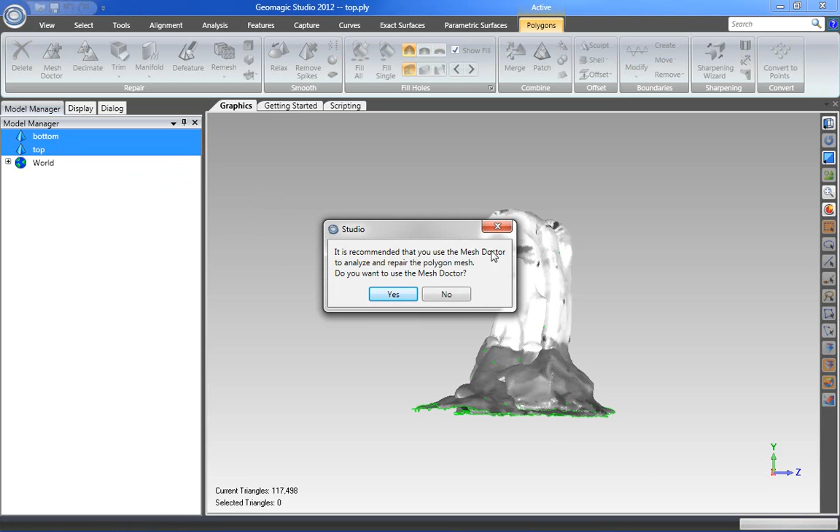You can select multiple files with the Control key and then click Open, and this will open up both of the files using their file names. It asks me if I want to use a mesh doctor. No.

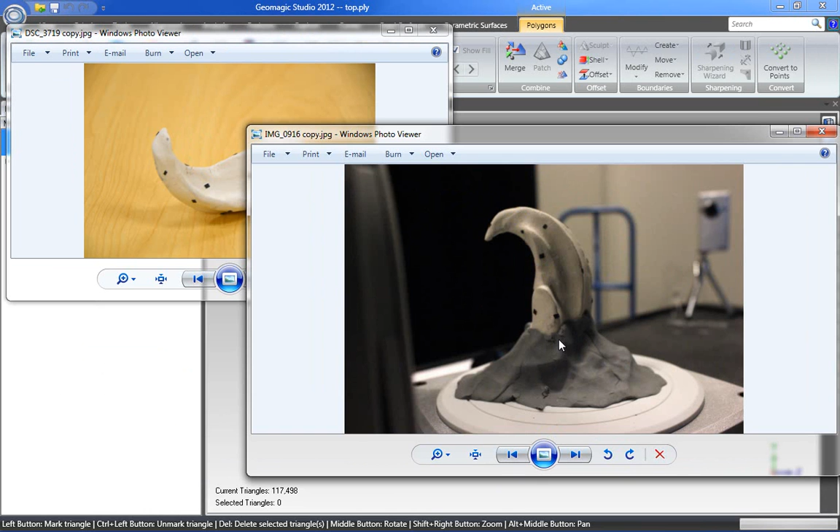Just to give you a brief context as to what we're looking at, this is the original object, and it was scanned in two different orientations. So in this orientation, I did a number of scans all the way around, and then flipped the object so this top part was embedded in the plasticine below, and then the part that's buried right now was then scanned.

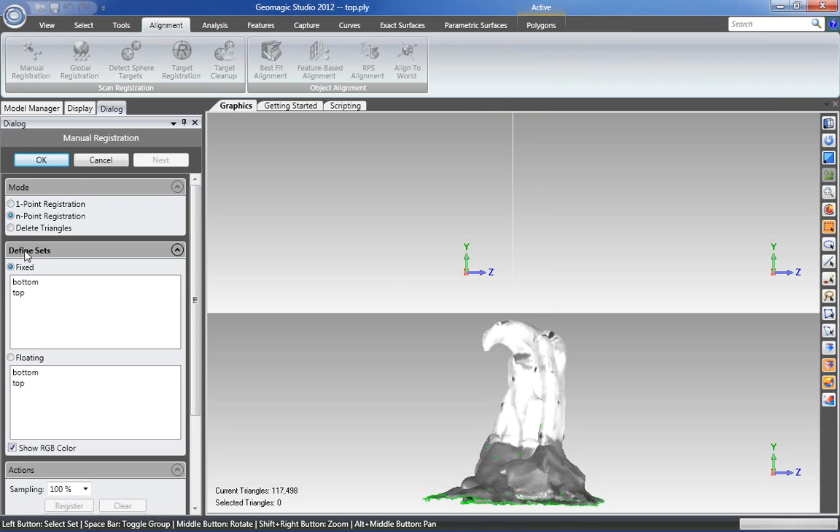So the first thing I'm going to do is go to Alignment, and I want to do a manual registration. Under this section here, I'm going to leave this on n-Point Registration. I'm going to select bottom. This is the part that's going to be fixed, and then the top part is going to be what's going to register to it. Based on what we were looking at before, these are both pointing up right now, but one of them actually has to get moved relative to the other one.

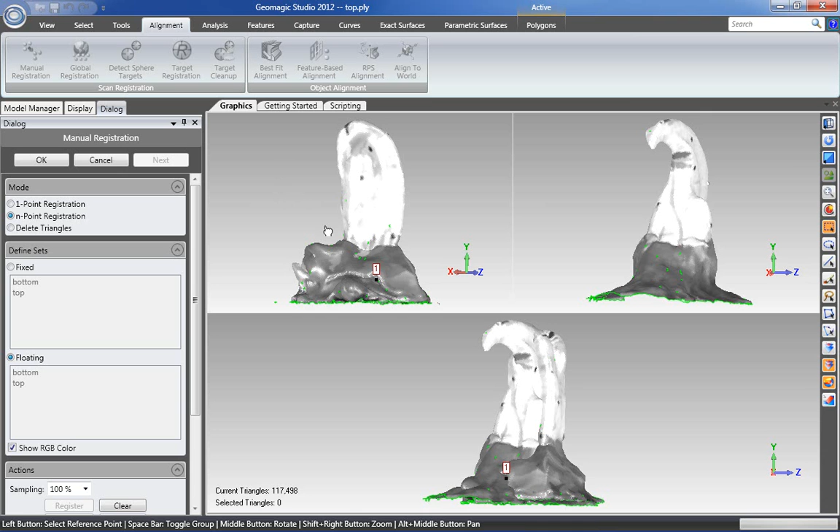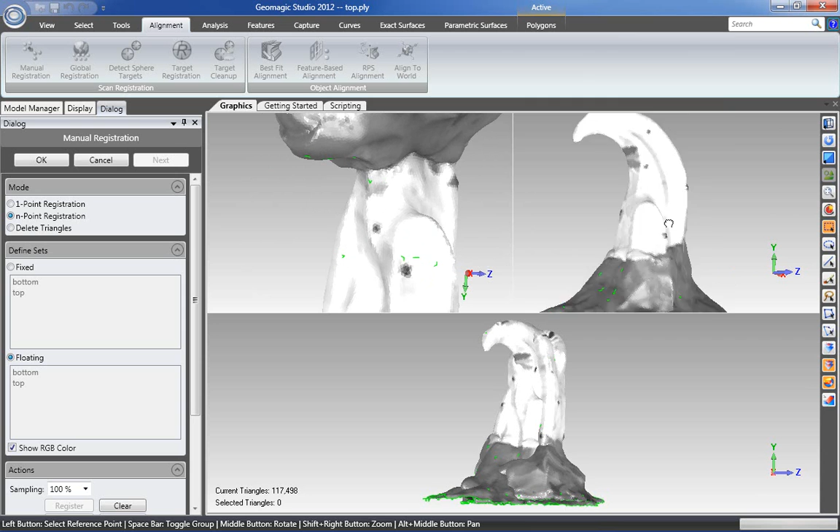So what I'm going to do is rotate this model so that it's upside down, but relative to this other model here, they're in the same orientation now. And then I'm going to simply look for a few common areas. It might also help if under Display I turn off my vertex color, so I'm just looking at the geometry now, because those registration points weren't the same in both cases. I moved things around when I was scanning, so they're not actually going to be that helpful.

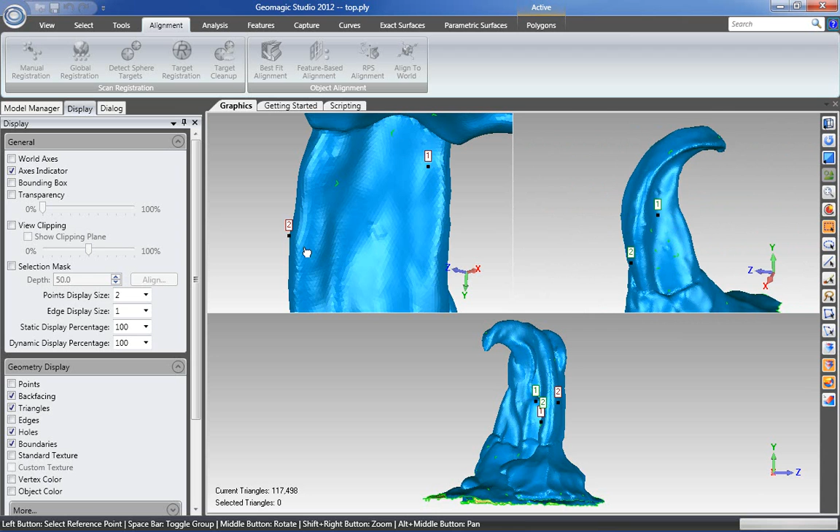So I'm going to just choose a few common points here. Maybe this guy right over here. Every time I click, I'm adding a number. I need 3 numbers. If I make a mistake, Control Z to undo, so I can undo my last placement. Looks like this guy right here is going to work as well. So I have 3, and if I go back into my dialog here, I'm going to click on Register. It's going to calculate, and then it's done. So I'm going to click OK.

The next thing I need to do is basically get rid of all this extraneous information, all the original plasticine that I was using for both these pieces.

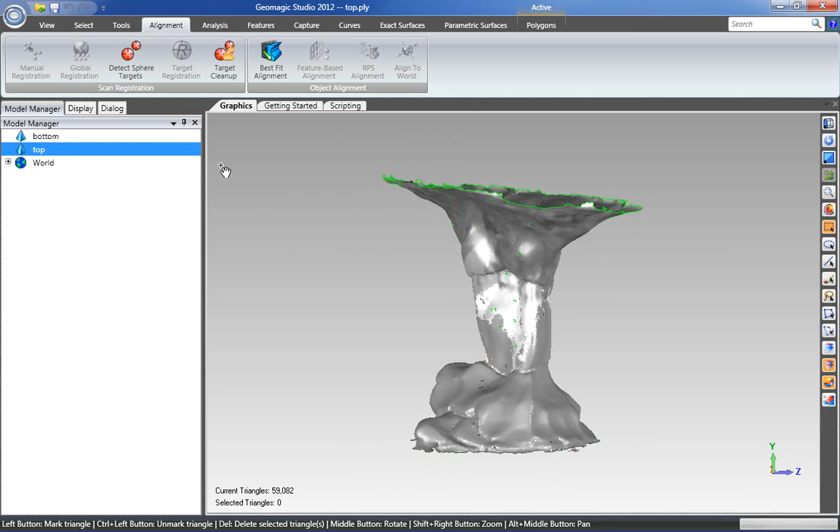And just a quick note about navigation here, you can see that as I click on one or the other, it sort of cycles between the two. When I have my bottom piece selected, you'll notice that I can't select this top area here. Only the bottom section is selectable, and vice versa. When I click on the top, it is now active. The bottom is not active down here. So that can be a good thing in terms of selecting things.

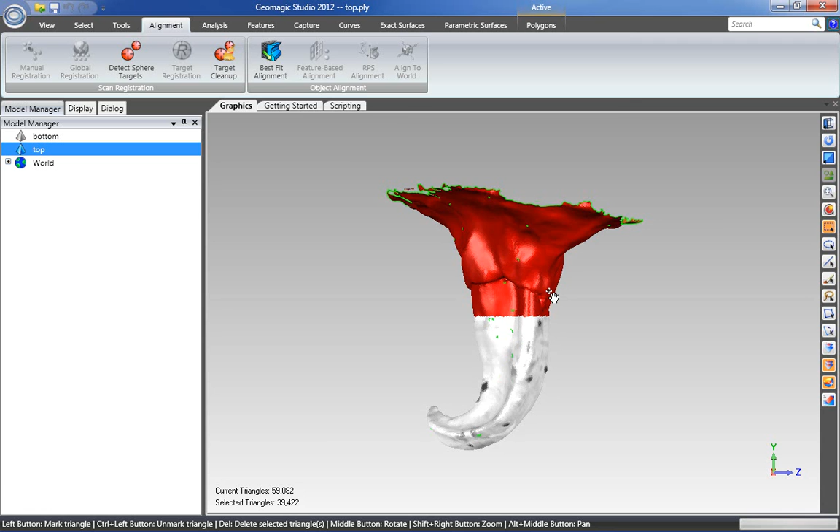I'm going to just look at things from the side here, and what I want to do is essentially get rid of, well, actually if I hide this, I can see this more clearly. I want to select everything that I'm not going to need, and I've got a decent amount of overlap between the two scans, which is fine, but I just want to make sure that I'm selecting all the way around. All this stuff here I definitely don't need, so I'm going to hit delete on that, and hide that previous selection, and then do the same thing on this bottom part here. And I want to be fairly generous with that selection.

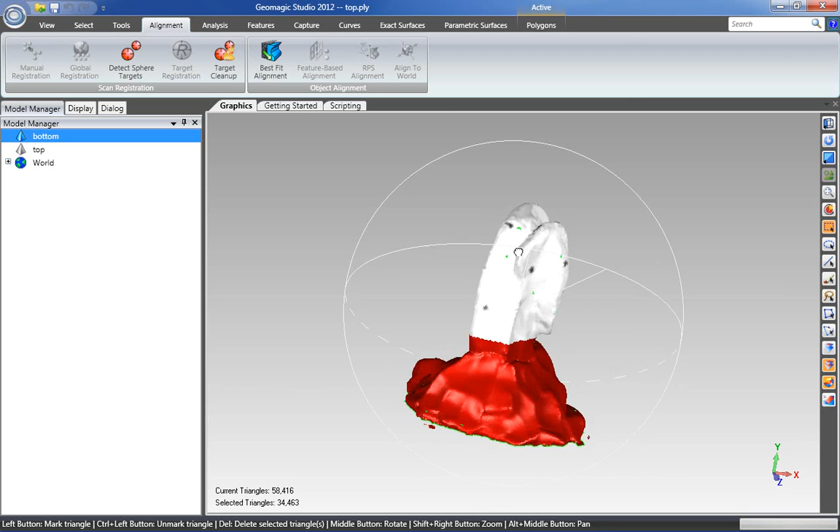I don't want to be too skimpy, because that data, as it gets closer and closer to the plasticine, that's definitely not going to overlap with the other part. And we want to make sure that what we're going to be using in the end is sort of universal to both pieces, as you can see right now.

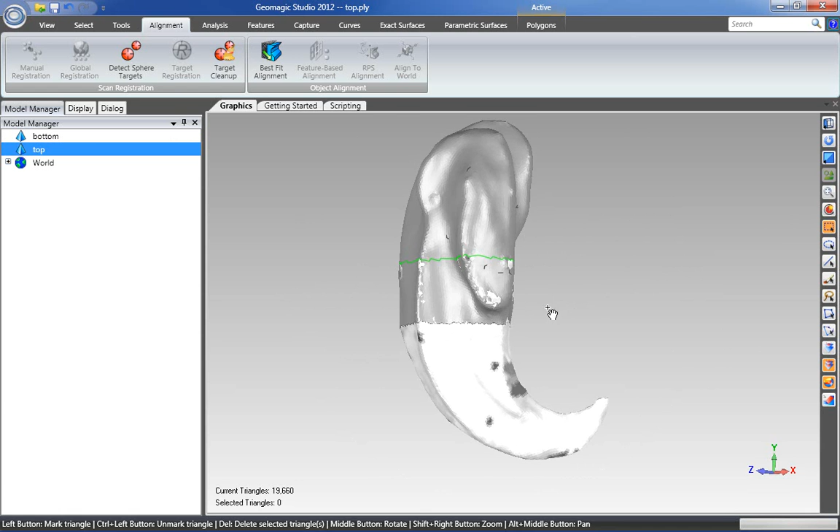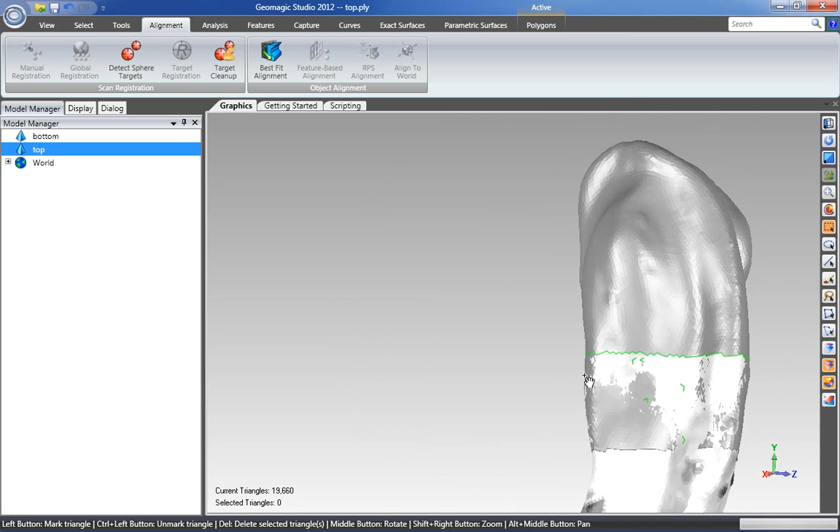So if I were to just zoom in a little bit, I can see that there's really no undercut happening along that seam. Looks like it's a fairly decent selection. If this were rising up a little bit and I could see underneath, I might want to be a little bit more aggressive with the overlap area. I might cut away a little bit more, sort of going in here and saying, okay, I need to be further down like that, for instance, and remove a little bit more that way.

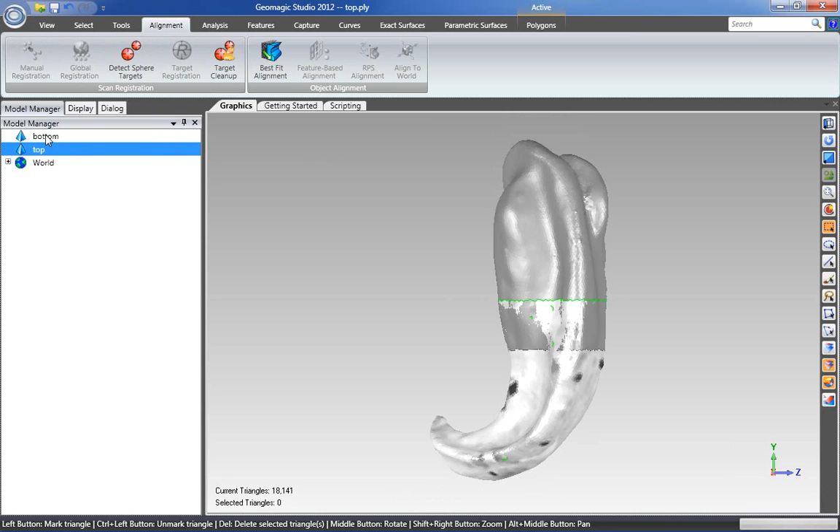So at this point, I'm ready to do a global registration, and you'll notice that global registration is grayed out right now. That's because I only have one of these objects selected. So I need to hit Shift and select both of them here, and you'll notice that all these other options appear now. So global registration is what I need, and I'm going to just leave all the settings as they are for now, and I'm going to hit Apply, and it's calculating, and it's just slightly moved the objects so that they sort of overlap better.

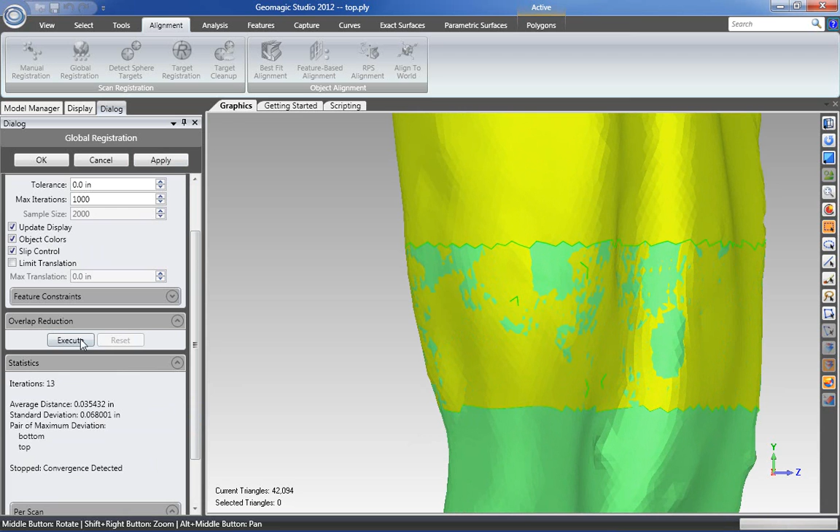I can do an overlap reduction here, and in doing that, if you look at the preview area here, it did actually move just a little bit, as you'll see right there. So it's not distorting the object, it's just moving it to sort of reduce any sort of deviation between the two as best as it can. At this point, I'm going to click OK,

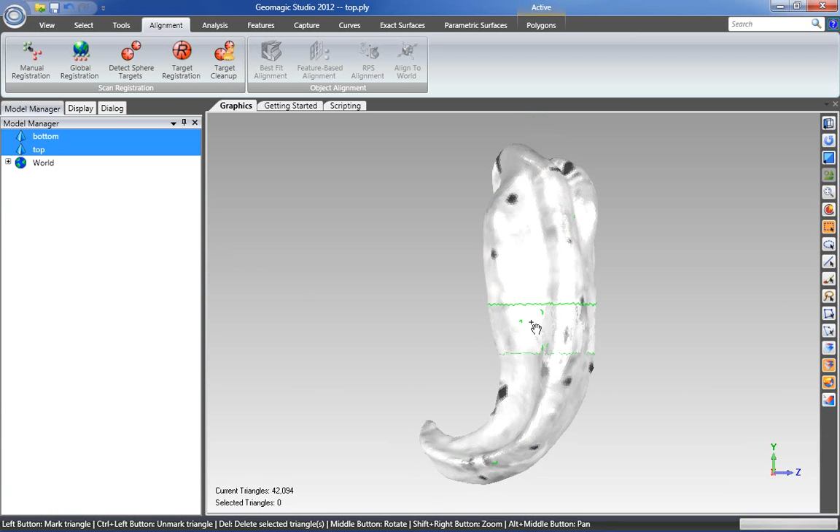and I'm going to go into polygons. And again, both of these are selected right now, so merge is available. If only one of them was selected, merge would not be available. So Shift to select both of them, and then merge. And within this command, we have options for reducing noise, both on the separate parts before the merging happens, or afterwards on the resulting object. I tend to leave noise reduction off in these cases. I'd rather have full control over what's happening, and I can always reduce noise afterwards in some of these other commands.

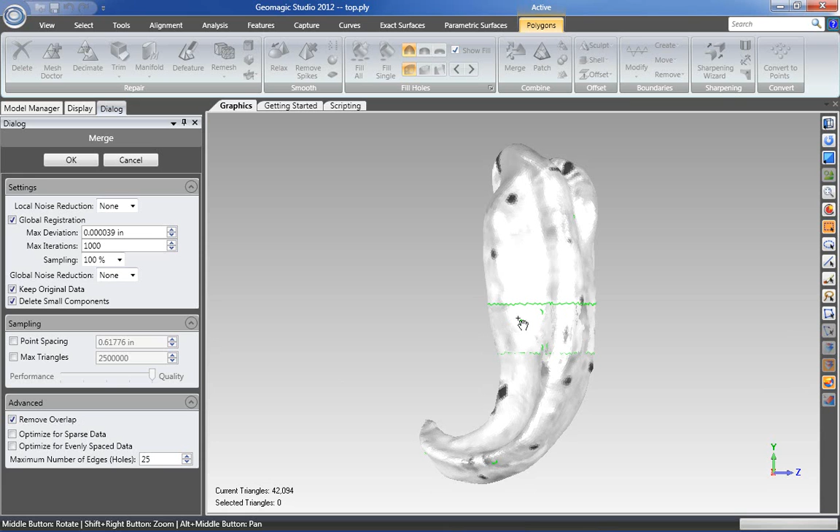So the maximum deviation, you can think of that as the amount that the polygons are going to move between the two different sections. I tend to just leave that at default for now. And then finally, under Advanced, I would remove overlap, so that it's going to remove anything that's overlapping, that's not contacting in here. And if I run OK, there we go.

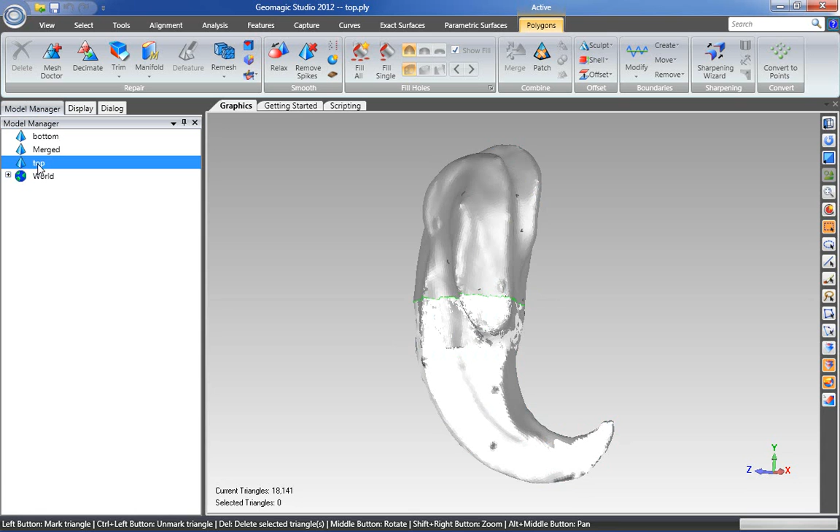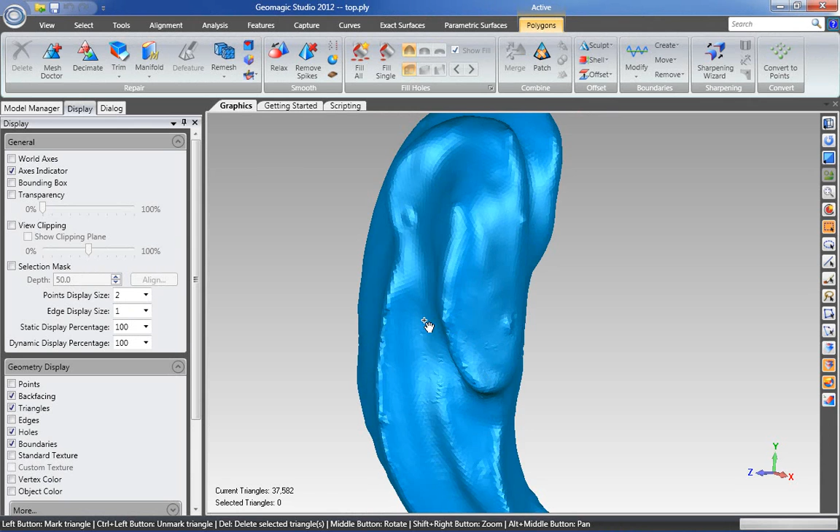And again, to look at the geometry without all that color information, I can look at it like this. So here are my original two scans. They're still in the file, bottom and top, and then selecting both of them. Oops. Allows me to see just the final result, like that. That's essentially how you'd create a merged mesh.

And at this point, I could, making sure that this is selected. Actually, I would do it directly from here. I would just right-click on there and then say Save. And then here I could save it under whatever type of format I wanted. If I wanted to keep the color information, I could save it as a PLY file again. And do it like that.

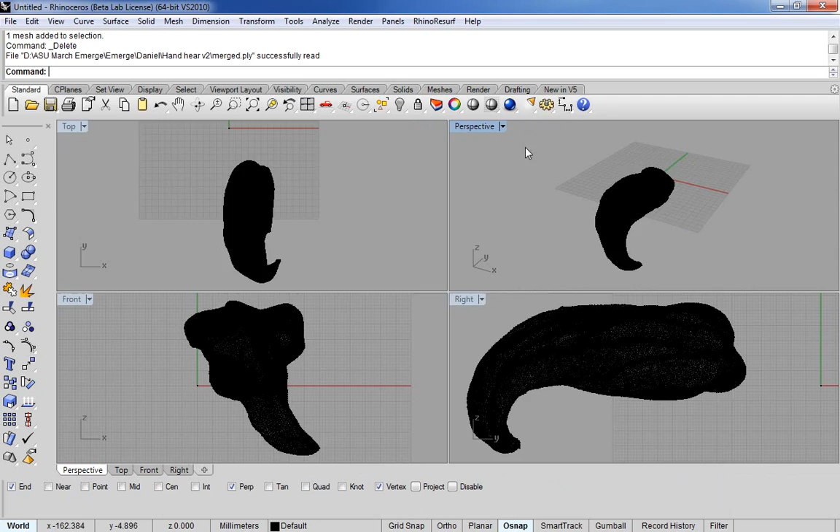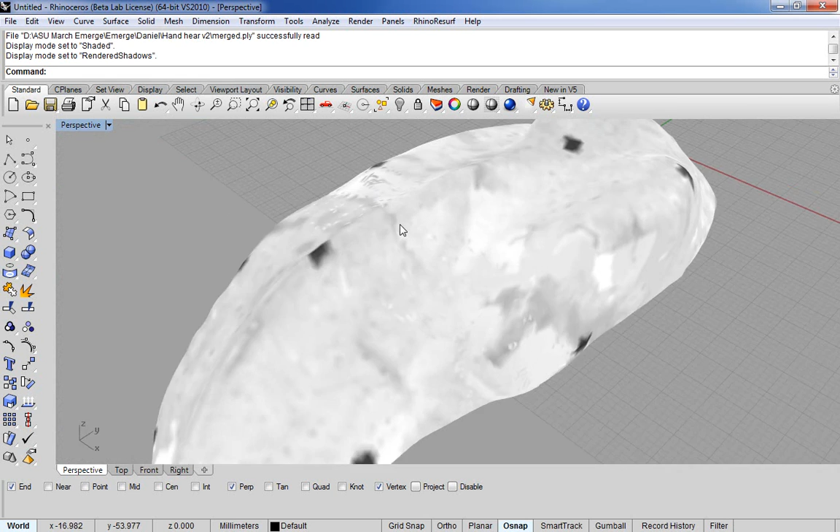And to see what it looks like in Rhino, if I were to just drag that in, this is Rhino 5. You can see the geometry. There are some discontinuities in some of the spacing, but that could always be remeshed in Geomagic as well. And you can see the color information from the vertices.

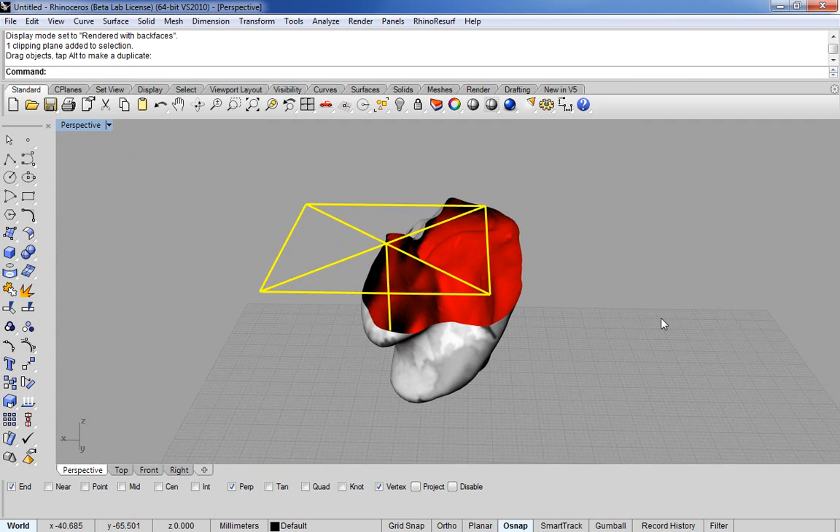Just to show, here we go. So it is one complete mesh, and it's good to go for whatever happens next. So that's how I take care of different sets of scans that need to be merged into one mesh.